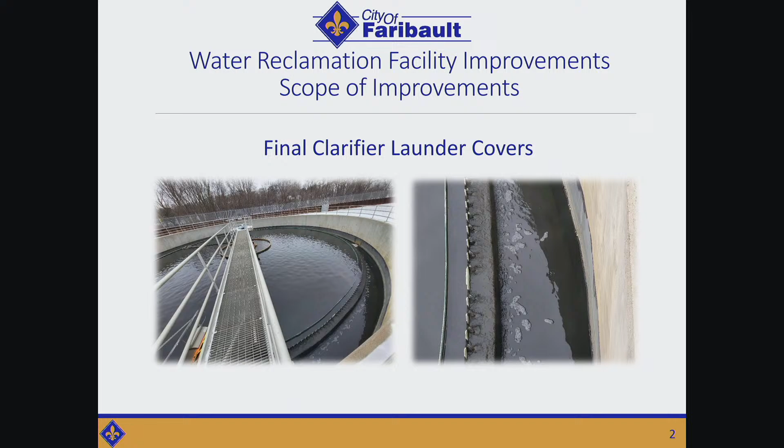The launder cover will go over the area on that picture on your right; that's the launder or the weir. That's where the final wastewater discharges to either the chlorination or disinfection process or the river, depending on time of year. The launder cover will cover that space to prevent algae from growing on there. When that algae grows, staff does have to spend an extensive amount of time cleaning it off, and it also can impact our treatment efficiency. That growth causes increased energy costs when we are chlorinating. So it's kind of a twofold thing.

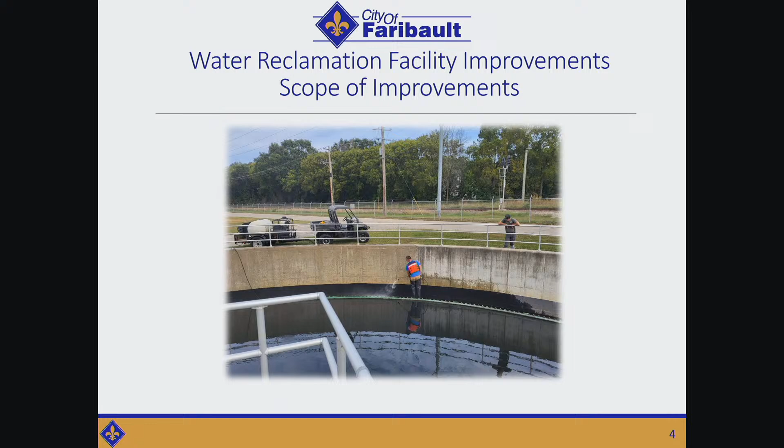It creates a safety issue at times. We do follow a protocol that we developed where staff members have to put a life jacket on. You have an observation person present to make sure nothing happens. So that improvement would take care of both of those things. The digester repairs consist of repairs to digester number 1.

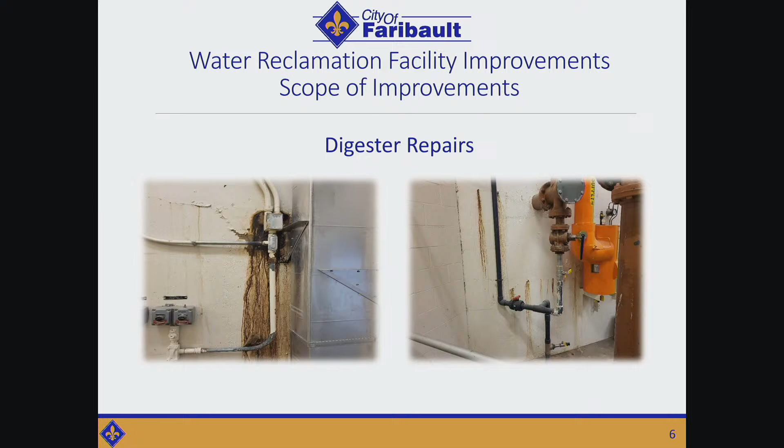And then with the primary splitter box, that started out as looking at making repairs to the structure you see in the picture. But when we started that process with the consulting engineer, it was determined that the extent of the repairs outweighed making them, and we just need to start from scratch. This is a 1950s structure. When the water is pumped into the facility, it leaves our headworks building and gets pumped into this structure, which then splits that flow into 4 primary tanks where the settling begins, and that kind of begins the biological treatment.

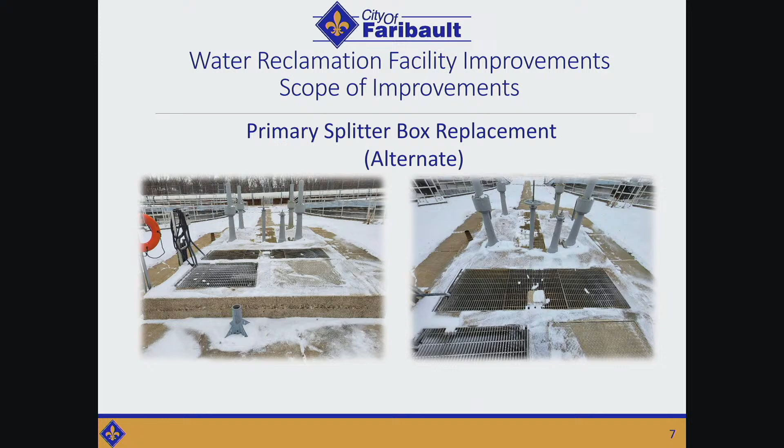Valves have failed in there to where if we need to isolate a tank, we have to disassemble the valve to make sure that we can do that, and so it's just time to replace that. So we're looking at doing that as an alternate, mainly because of cost. That item was not initially in our budget, as the other 2 items were approved as part of the CIP. So if we get favorable bids, then when we receive those bids we would be bringing forward acceptance of that approval and a budget amendment if, like I said, they're favorable.

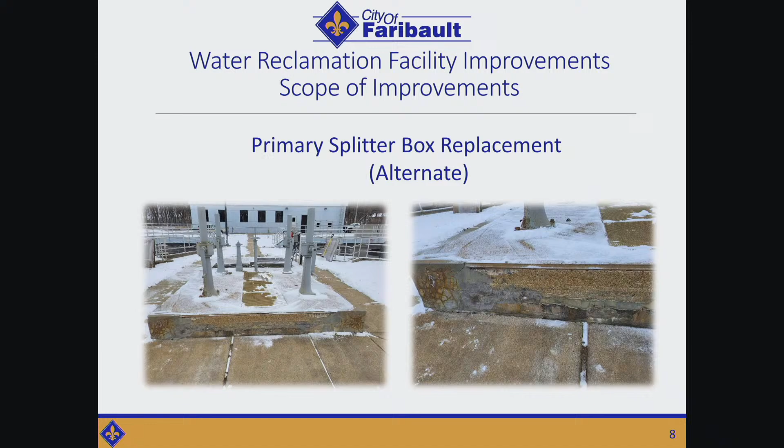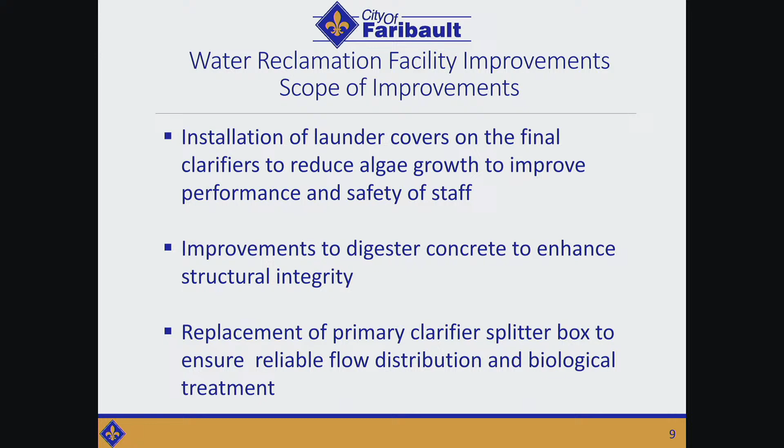This is just another picture. You can kind of see there a little bit on the bottom where the surface meets the sidewalk, where it's starting to crack. We've made some in-house repairs again to that. The time has come to just replace that structure. So just kind of a recap of the scope of improvements: the installation of the launder cover on the finals, improved performance and safety of staff, improvements to the digester to enhance the structural integrity of that, and then the alternative, replacing the primary splitter box to ensure reliable flow distribution and obtain optimal biological treatment.

So the preliminary cost estimate for the launder covers and the digester repairs is $535,000, which is just slightly over what's been budgeted, and the alternate of $1.2 million. When we went with the intent to include this as an alternate, the consulting engineers were thinking that we may get some better pricing if we're packaging all these things together. We're hoping to attract some folks that normally wouldn't have bid on just the launder covers and the digester repairs, maybe a few more bidders, and then hopefully we'll get some favorable bids. And the funding for that would all be proposed to come from the sanitary.

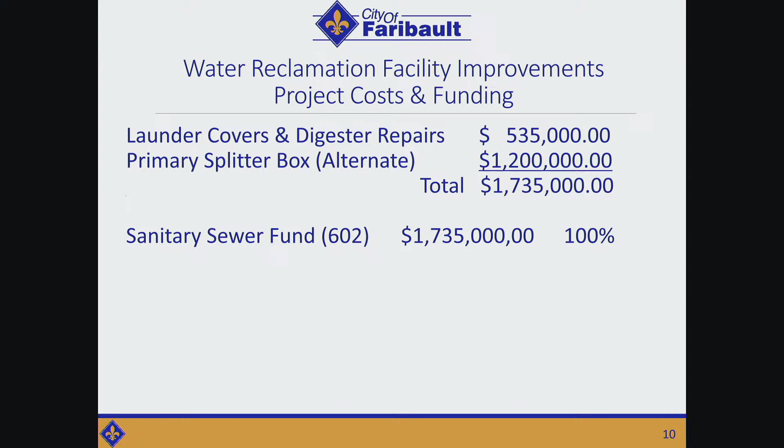From a scheduling standpoint, improvements were ordered last year in May when we started the preliminary, like the feasibility and looking at alternatives. Tonight we're approving the plans and specs, and we'll be looking to receive bids on March 17th, award a contract in April, start in June, and then substantial completion. So with that, I would recommend the approval of resolution 2025-041. Questions? Yeah.

So when we receive those bids, we'll see. We're hoping it comes in under the engineer's estimate. The one thing that was difficult is in preparing that cost estimate, they wanted it to be kind of worst case scenario, so we're hoping maybe it's quite a bit less than that. It could be, we don't know. So when we receive that, I'll revisit it with Mr. Kinzer, and we'll sit down and look at it and see if the fund can sustain that. If it cannot, then we'll have to just program that into a future year.

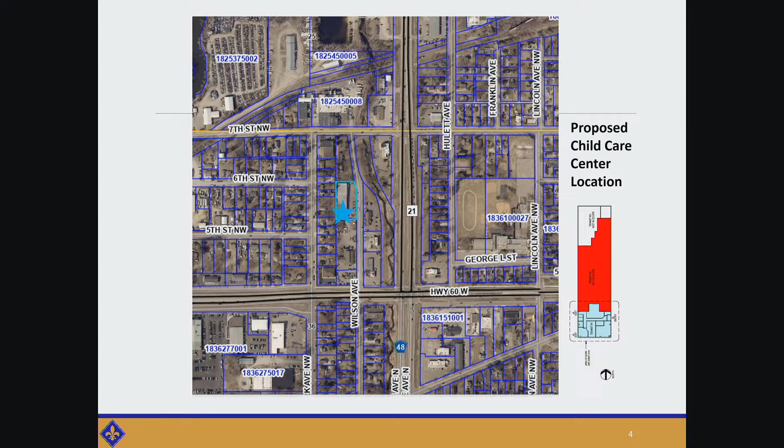The location along Wilson Avenue is just behind Taco Bell, also just behind the chamber, between Highway 60 and Lyndale Avenue. The building was built in 2005. The child care center is going to be on the south side of this building. I think there's a warehouse and a store also within the building. It'll just be taking a portion of the southern tenant space. As I mentioned, it's a conditional use permit for a childcare center within Shoreland.

To provide some history, in 2005 a childcare center actually did go into this particular tenant space. Since then, it transitioned to an office. Under the Shoreland regulations, as dictated by the DNR, any new uses, if they've been discontinued, have to go back through this process.

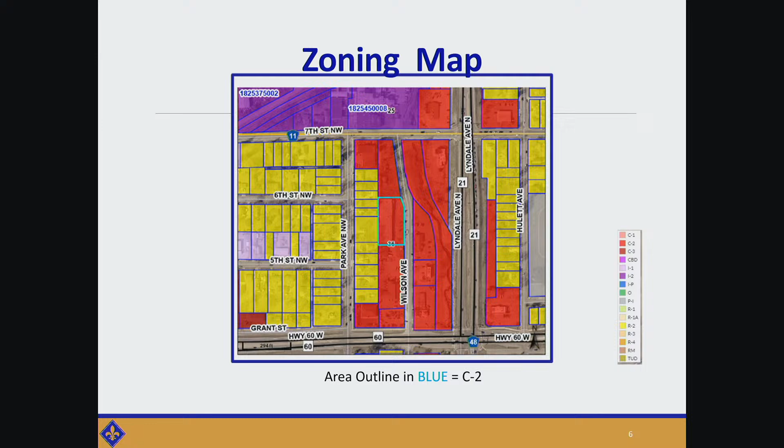The zoning map shows this is C2, commercial thoroughfare, which is not unlike a lot of our other commercial areas around town. But when we take a look at our overlay district map, we see the shoreland buffer, which is kind of this big white area. The tenant space is covered just slightly by this shoreland overlay buffer. Just a little bit more outside of it, we wouldn't be going through this process. But it is within shoreland, because of Crackers Creek.

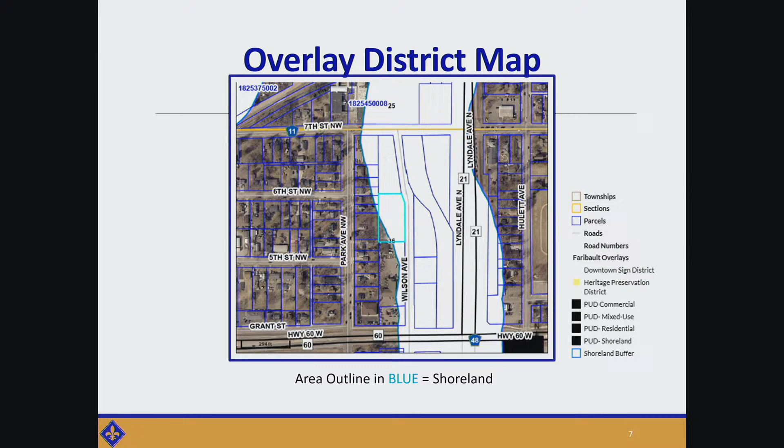So the childcare use, from staff's point of view and from the Planning Commission, we've both recommended that this is actually consistent with all of our C2 district standards as well as the Shoreland Overlay District. We have received some feedback from DNR that they don't have any opposition to this request and are in support of it. So generally, this is meeting all of our code and ordinance standards. So staff and the Planning Commission do recommend they approve Resolution 2025-047, childcare facility.

Any comments or questions? Okay, we will need a motion to approve Resolution 2025-047. Motion by Councilmember Teo, second by Brown. All in favor say aye. Aye. Against? Motion passes.

So tonight we have Resolution 2025-050, approve revised plans and specification and establish bid date for Straight River Water Main Crossing, contract 2023-09, by Director Mark Duchesne. Thank you, Vice Mayor Dumbuya and members of the council. Before you tonight is a resolution to approve the revised plans and specifications and set a new bid date for the 20-inch water main crossing underneath the Straight River.

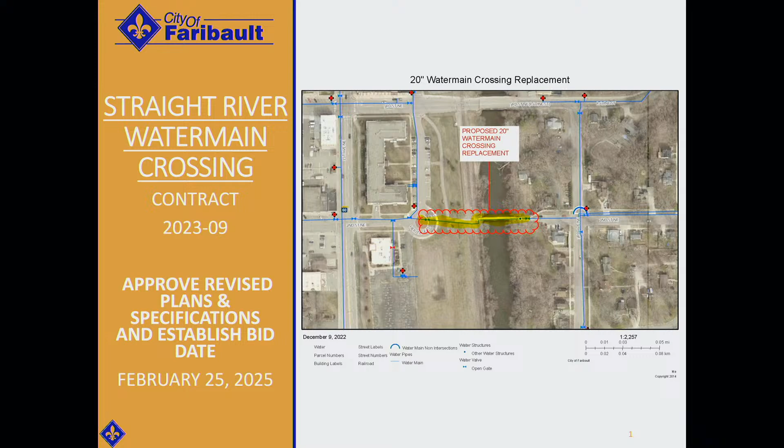The other timing thing with this is the proposed ice feature of the Viaduct Park will encompass a large portion of this. So before we put a substantial investment on the surface with the liability underground, now would be the time to remove that liability underground so that we don't have that risk. Again, a new 20-inch water main transmission pipe. This water main carries all of the water from our filtration plant up to the reservoirs on the east side.

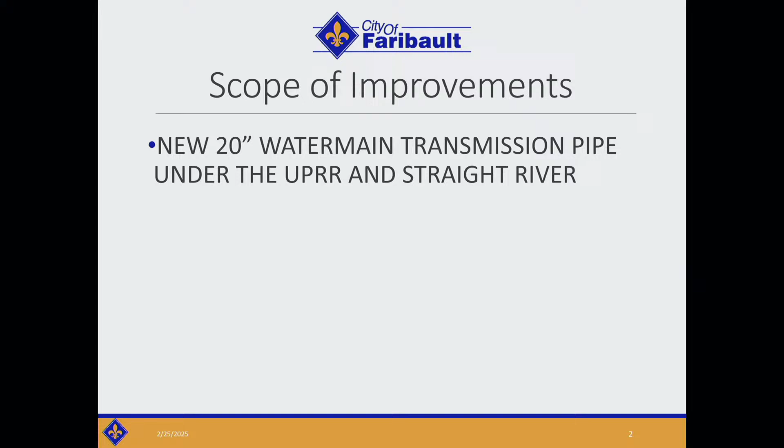Current estimate, including engineering design fees, is $1.6 million. We've got a construction estimate of just over $1.4 million. Approval of plans and specifications tonight. We have set a bid date for March 19th to come back for award on March 25th. We have a somewhat flexible construction start date for the contract, but we do have a contract completion of September 2025. With that, I will stand for any questions, but we do recommend approval of Resolution 2025-050.

Any comments? Okay, if not, I will need a motion to approve Resolution 2025-050. Motion by Council Member Barnes, second by Van Sluis. All in favor say aye. Aye. Against? Motion passes.

Okay, that was the end of our items for discussion, and we don't have any bid tonight. And next is the board and commission reports, announcements, and project update. Yeah, go ahead. Thank you, Administrator Kinzer. Comments?